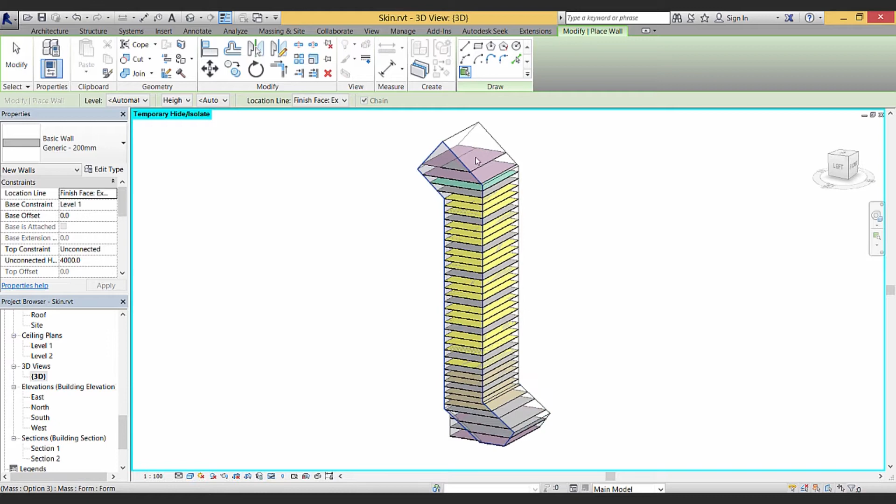But if you're going to have a curtain system, like a glass system, or any kind of crazy pattern thing, you're going to have to use a different method. Basically, you can create pretty cool patterns inside the conceptual massing environment, which is basically where you make this mass.

But there's a problem with divided surfaces and adaptive components and these kind of crazy components that you can use to create a cool pattern on your facade, and that is they're not room bounding. You need some kind of room bounding element inside your model to have the correct areas and outer boundaries for rooms. We'll get into details on that later. Basically, if you open level 23 and you start making rooms, they won't be enclosed. So you need closed spaces in order to start placing rooms.

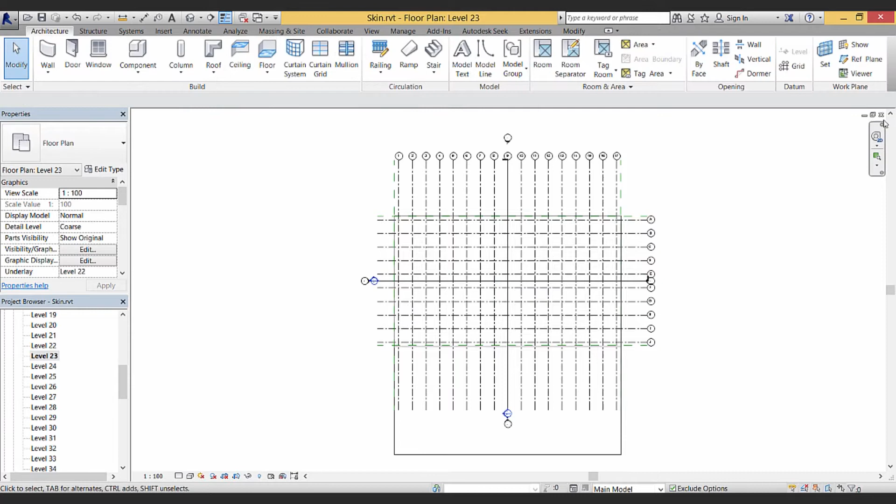Now, as I said, there are different ways you can do this. One way that I like is to just create a curtain system that's empty on this building, and then start playing around with the facade inside the conceptual massing environment. So this will be a dual exercise. First, we'll create a pretty simple empty facade just for creating room bounding elements, and then we'll create the real facade inside the conceptual massing environment afterwards.

So first of all, we go Massing, model by face, and we go curtain system instead of walls. The curtain system selected by default is the curtain system 1500 by 3000 millimeters. Before we click anything, you can see that Revit is asking us to stitch this curtain system to any of the faces inside our mass. So let's change this first. We go Edit Type.

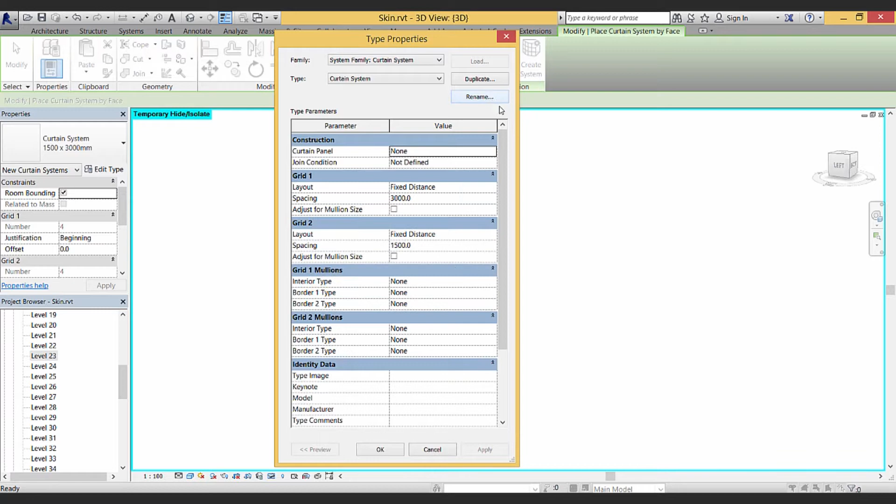I'm going to rename the type to just curtain system none, or whatever. Then I'll select the curtain panel to be an empty system panel. And then grids, no. Grid 2, no. No grids. Okay. And then I'll orient my model. You can use the view cube here.

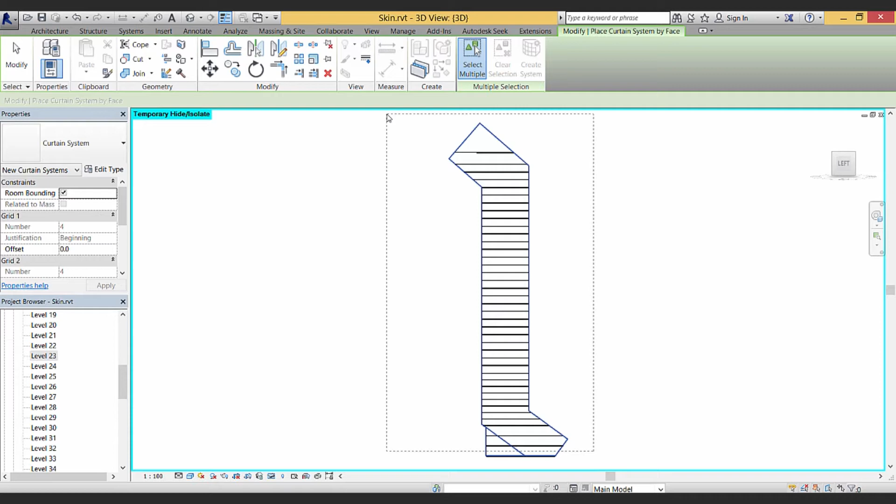I click left. Then I draw a crossing window across the entire building on all sides, but I don't include the bottom, the ground floor of this model. This is because I don't want a curtain system on the floor inside my building. So when I let go and say Create System, I'm actually done in 2 seconds.

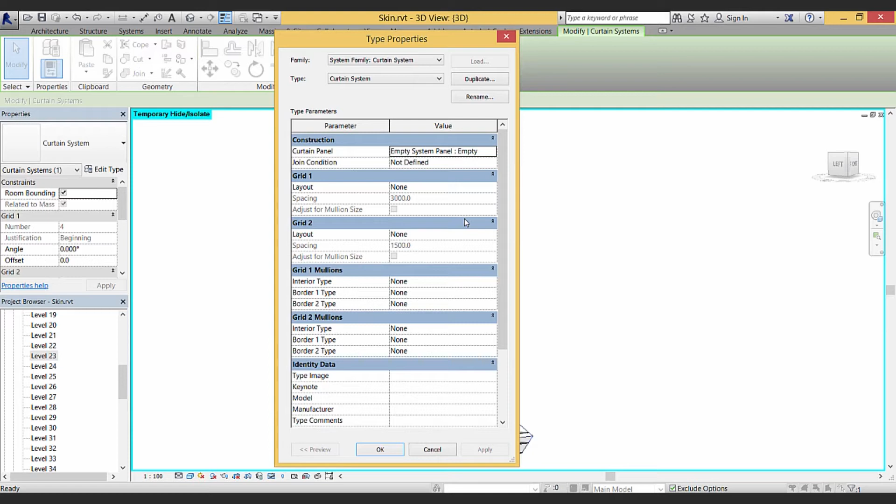So I click Modify or Escape, and you'll see that you can click on something here. It's called a curtain system, and it's actually a facade element. You can go into it and change things around, adding grids, distances between grids, panels and everything. But as I said, it's not going to give you a lot of options for making a pretty cool facade. So if you want to make a cool facade, you have to do different things.

But this one is room bounding. And that's pretty sweet because now you can go back to level 23 and start adding rooms like this. It's an enclosed room. When you add this room, it's going to give you an enclosed room with areas and all kinds of information that you can use later on when you start designing your floor plan. We'll touch on that later.

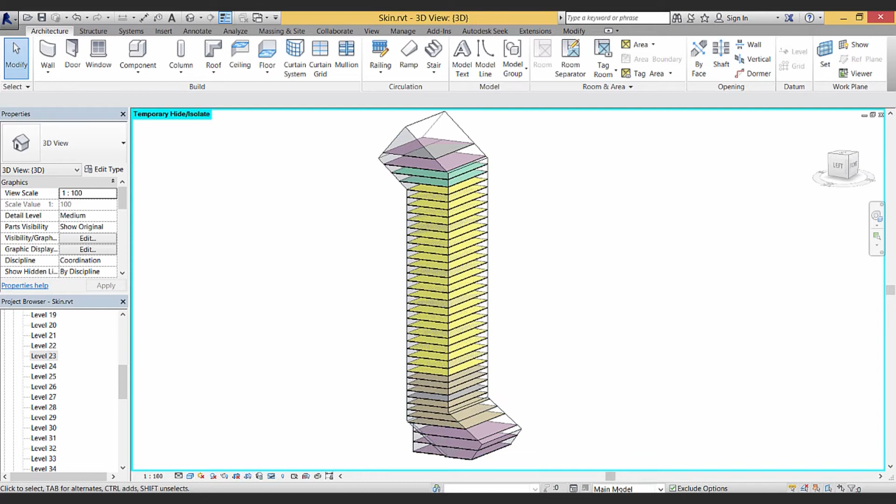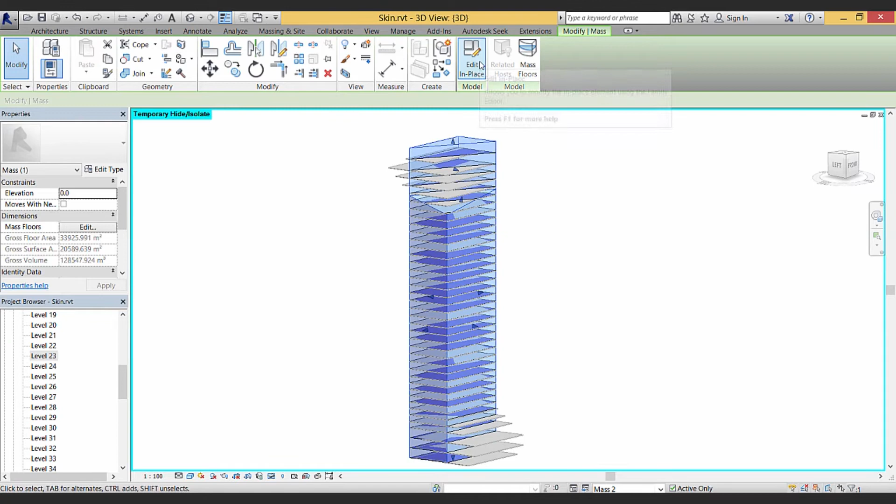Next up, I'm going to give you a quick introduction into how you can make a facade that looks a bit more interesting than just a normal uniform facade. To do that, you need to enter the conceptual massing environment. For a placed mass like this, you just open the family. Like I said earlier, in option number 2, we have this one here. You just go Edit In-Place, which is something else. You enter sketch mode for this family inside the same project environment.

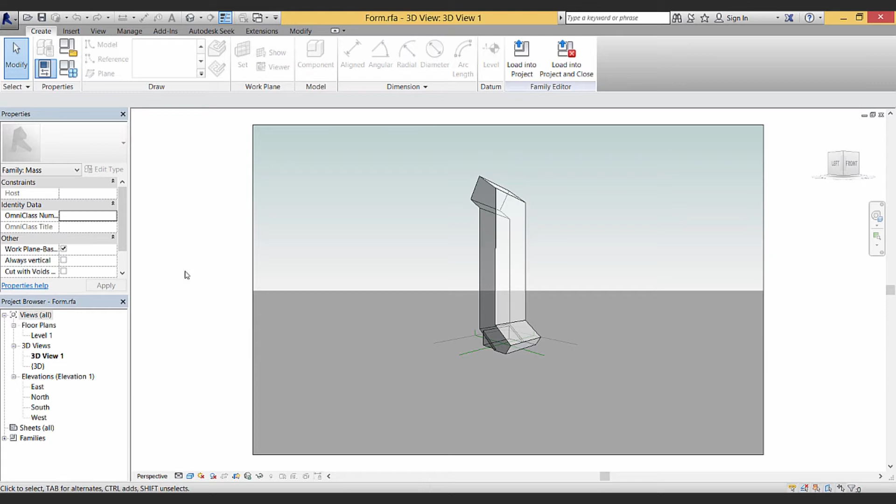Now, the placed mass that I modeled in option 3, if I open Edit Family, it will actually open a separate file. I haven't touched much on that yet, but this is a separate file. It's called form RFA, that's the file extension for Revit family. So inside here, you don't have access to the project information. This is a separate family, and you can use it in any other project. My colleague can edit this family in a separate Revit session, and then I can just load it into my project.

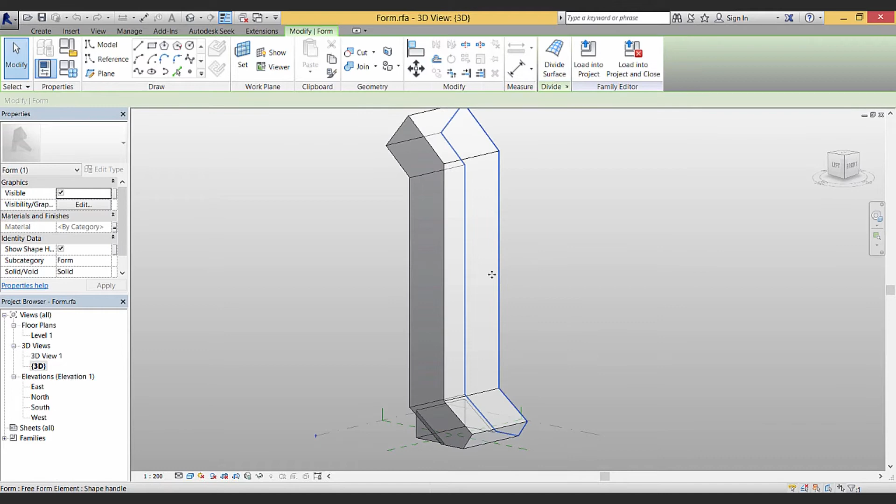So the interesting thing when it comes to facades in the conceptual massing environment, which I'm in now, is that you can click on any surface and use a Divide Surface tool. Basically, click on one or several surfaces or faces, and then you click Divide Surface. Divide Surface will now put an element on your surface, and it's going to have a grid.

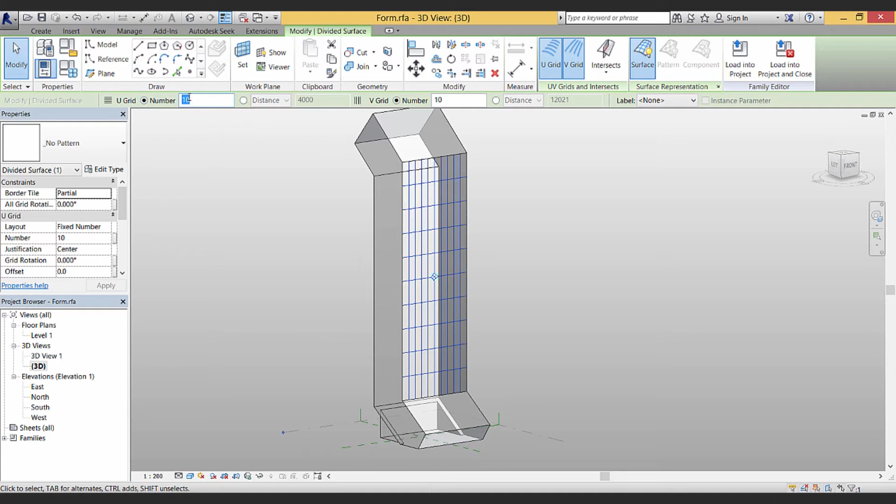So this grid, you can change the grid spacing using these new parameters that you get access to. You have a UV grid that you can change parametrically. If I change the U grid number to 20, you see that it gets a much denser grid horizontally. Let's change this guy back to 10, or the V grid to 20. You can see that it gets a much denser grid vertically or horizontally.

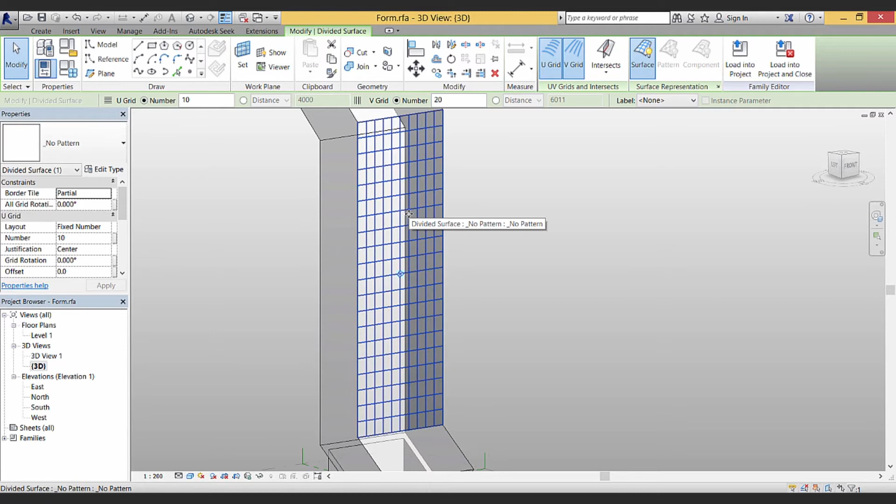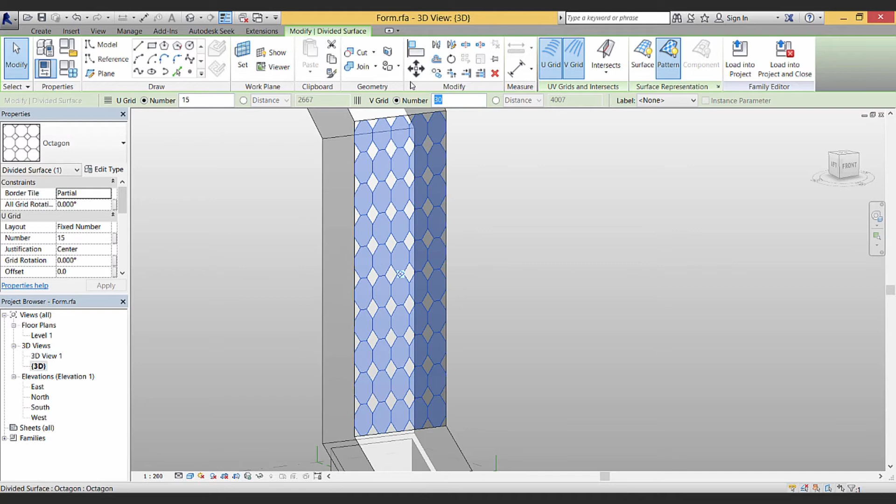The other thing you can do that's pretty cool is change the pattern. If you click on this grid and select it, you can go to the properties palette and change the pattern to something else—arrows, hexagons, or octagons. You can still change the grid spacing, 30 like this, or 15 like this. This is much more flexible, parametric, and I think beautiful than anything you can do with curtain systems inside Revit.

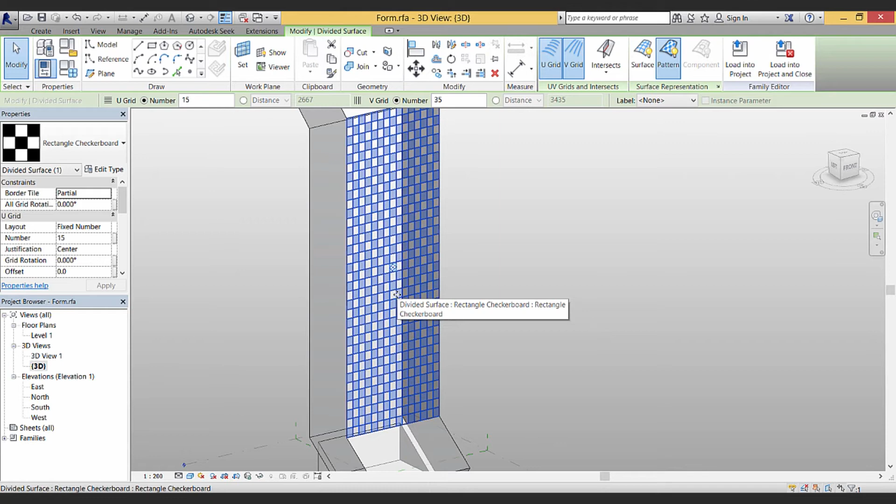So let's change this to something like a rectangle checkerboard. Then we can start parameterizing this, because we want to have parameters to change the spacing of these grids. One way you can do that is to change the actual layout of your grids.

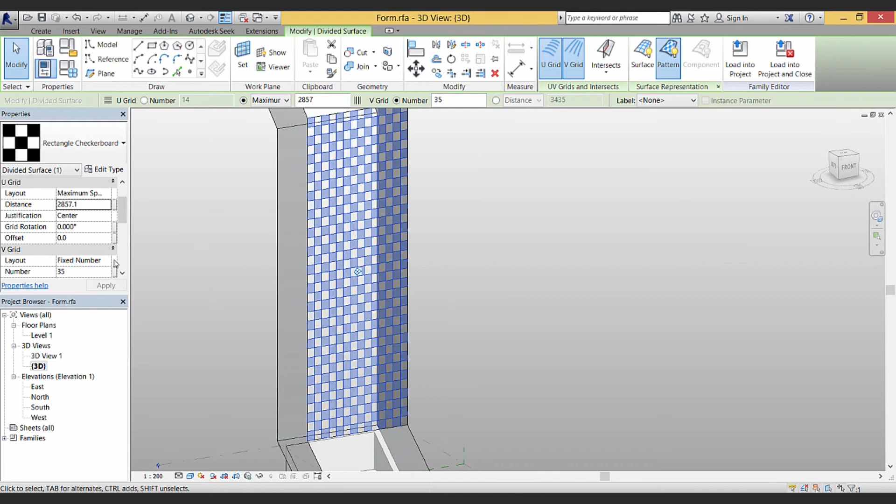Basically, instead of a fixed number, you can go maximum spacing or fixed distance. When I change the layout from fixed number to maximum spacing, I use different inputs. With fixed number you say 16 or 15 or 14 and it changes your spacing. With maximum spacing, I have to enter a real number, so I can change this to 1 meter, for instance, and get an insanely dense vertical spacing between the checkerboard panels. Let's change that back to 2 meters.

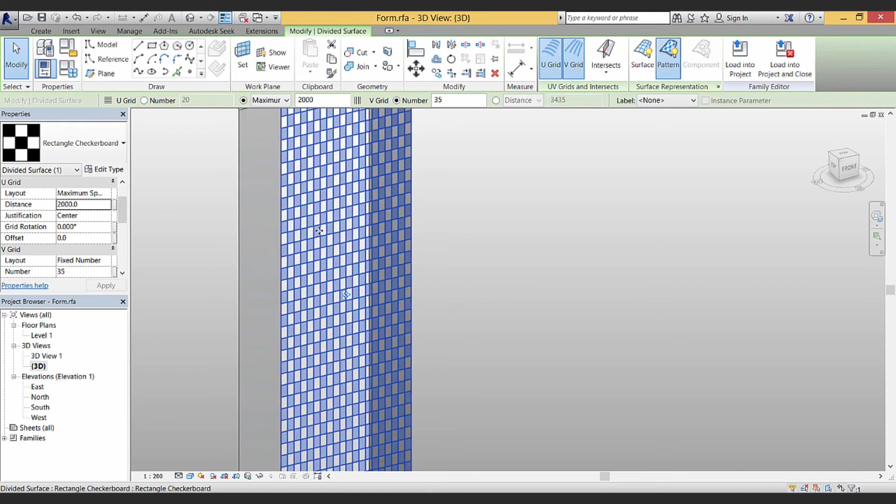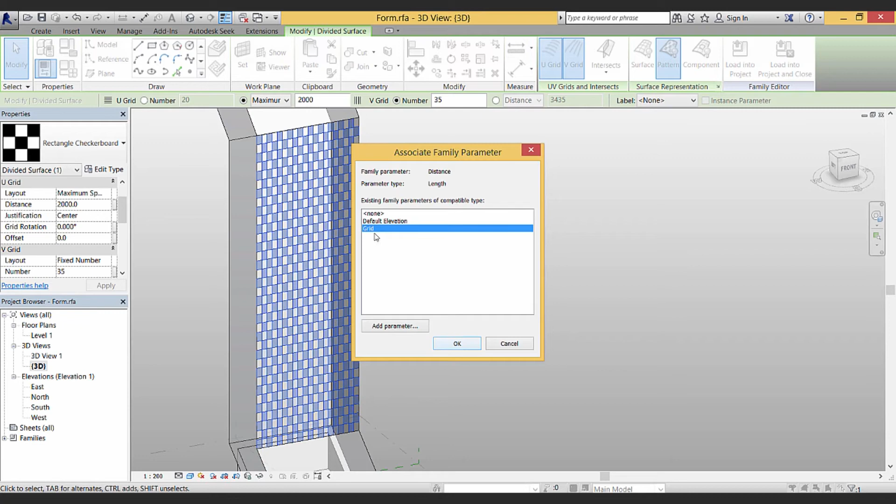You can also associate that parameter, which is now just the U grid parameter for this divided surface, with a new parameter by clicking the small button next to the distance that says 2 meters. So I associate this parameter with something else—let's call it grid. I already have a parameter, I've cheated, sorry about that. So I'm associating the maximum spacing distance parameter with a new parameter called grid. OK, and then it changes to what?

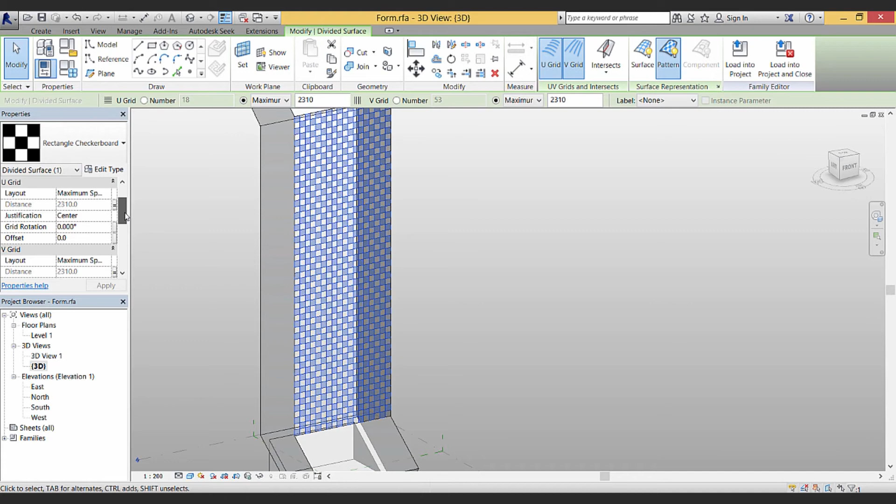2310. Cool. Let's do the same thing with the V grid layout—go maximum spacing, associate the distance with the same parameter, grid. Now the grid spacing is identical in both the U direction and the V direction, at 2.31 meters spacing. The power of this is that using the family types dialog box, I can go and change the grid spacing of multiple directions at once. Let's change it back to 4 meters, or 2310 like this.

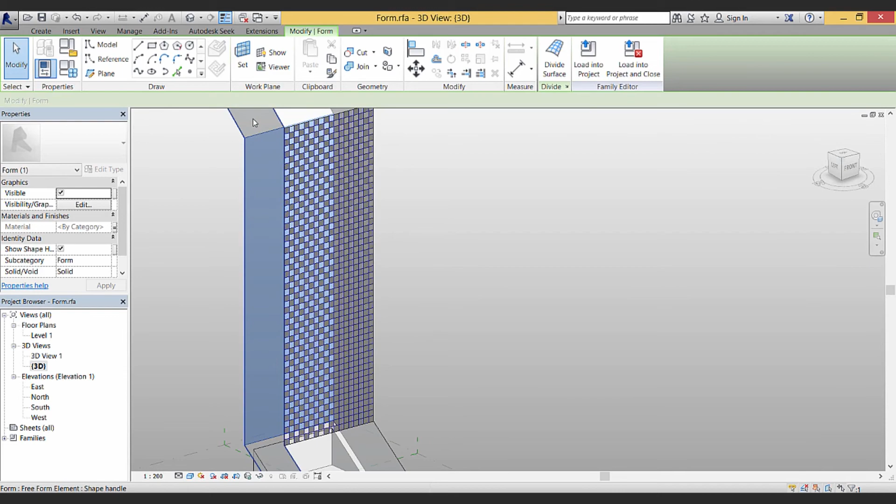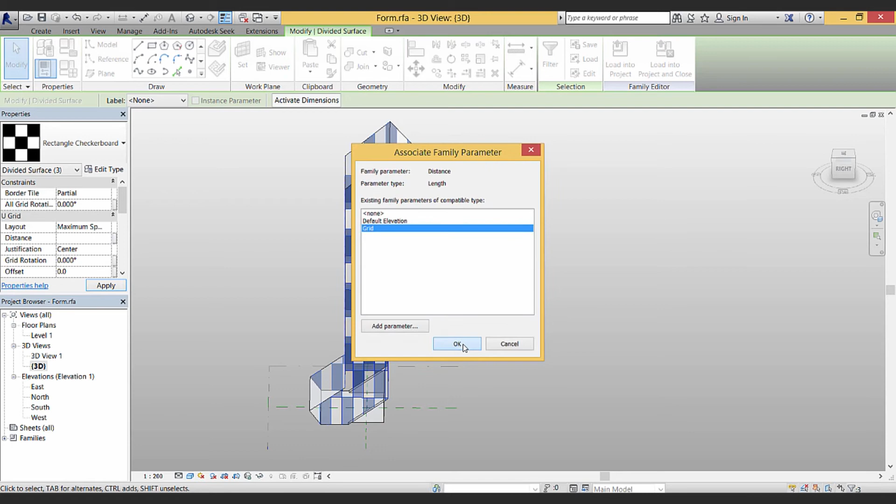I can also click on this facade, and this facade, and the back facade, for instance, and then go to divided surface. I go from no pattern to checkerboard pattern, change the maximum spacing, and associate the parameter with the grid parameter, doing the same thing in the V direction.

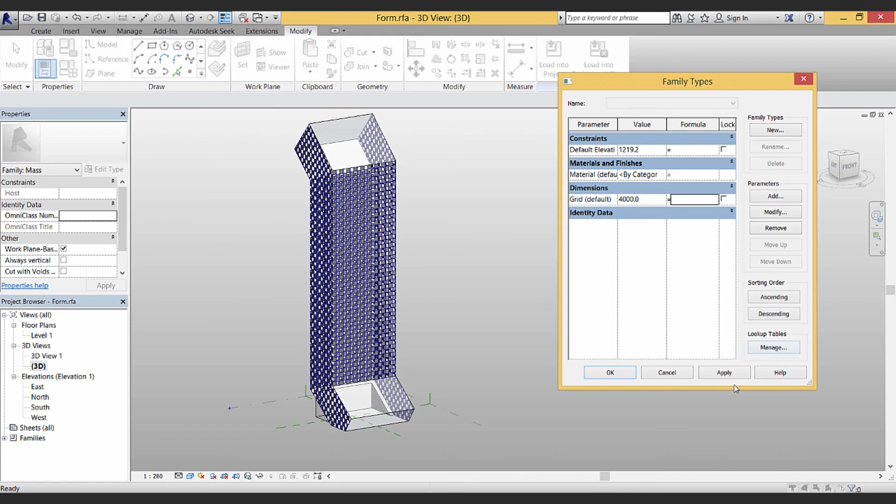Now you see the real power of this parametric way of working with elements inside Revit. I have one parameter called grid, and when I change it—not 45 meters, just 4 meters—and apply, it changes the grid spacing of the entire facade. That's pretty cool, and I'm not even going to go further with this.

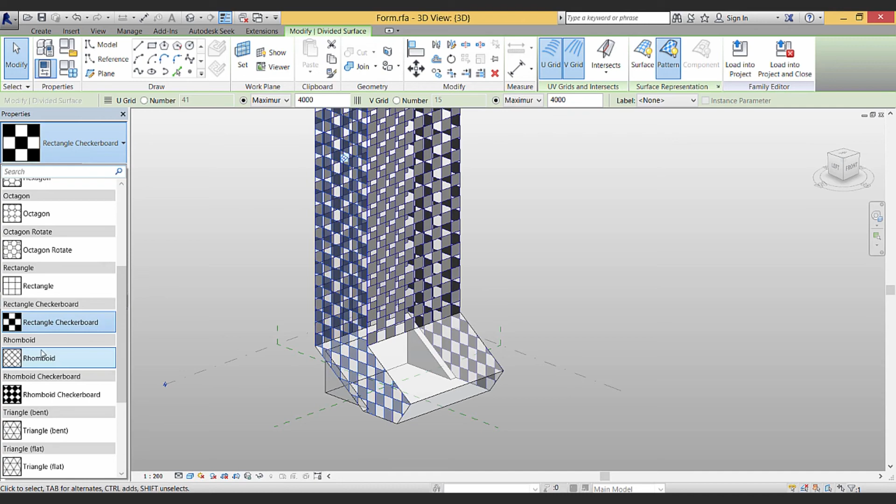Let's just say the rectangular checkerboard here is a set, and there's also rectangle and octagon rotate patterns. All these are predefined patterns, and you can make your own based on these templates. There's a lot of possibilities here, and you can start playing around with adaptive components—not really suited for Revit basic training, but there are many possibilities to do cool facades inside Revit.

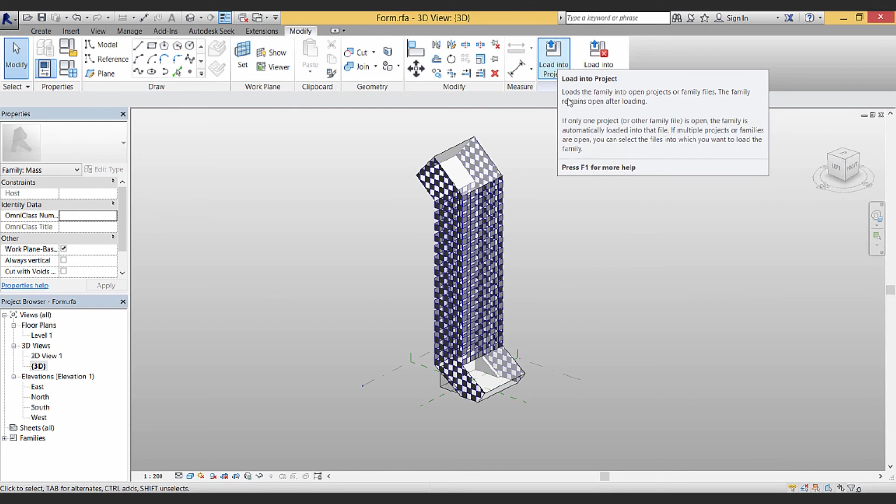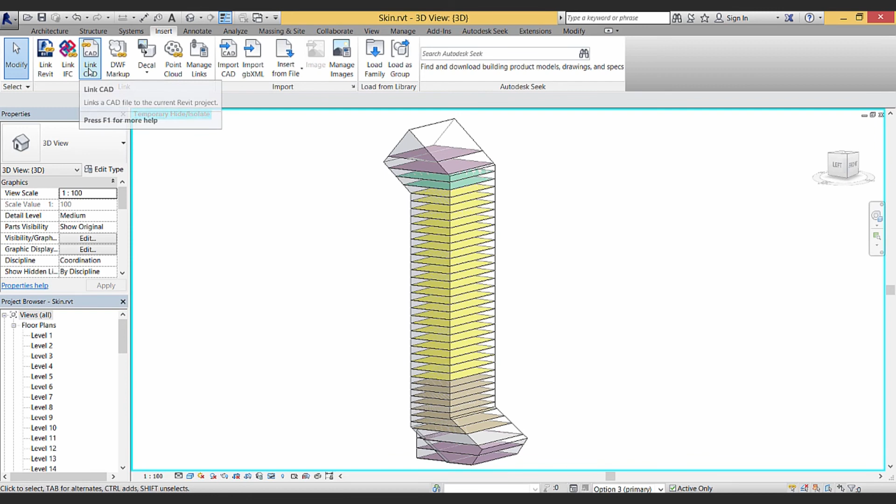Now we can either load this into our project, or cheat and load a family that I already made—and I think you can guess which option I'm going for. So I'm going to go Insert, Load Family. Insert is a tab inside Revit where you pull in anything not natively a Revit family, like other Revit files, IFC files, CAD files, point cloud files, whatever. You can also load another family using the Load Family tool here.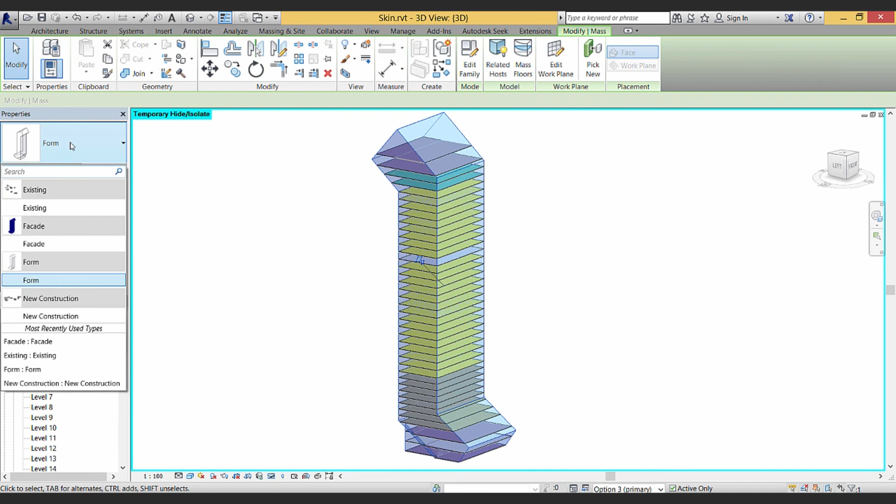Let's go back to the references, where I have a family called Facade. I'm going to load this family into my Revit project. I'll click on the Form family and change it to the Facade family, which is basically the same family but with the parameterized grid.

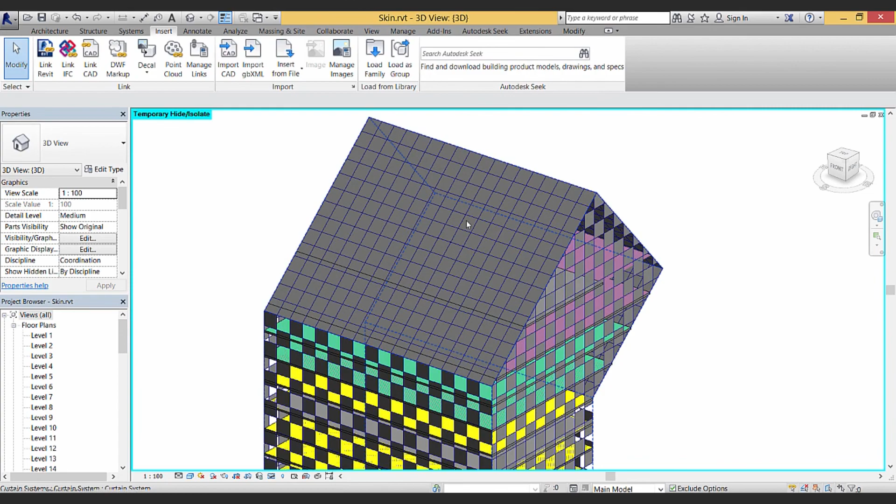And that's it. Now I have a pretty cool facade with a checkerboard pattern around the main body of the building. I have some solar panels up here, glass panels back here, and more glass panels back here—really glass panels, although they're not transparent right now, but basically a pretty cool pattern. I also have the room bounding curtain system that allows me to add rooms, which is the best of two worlds.

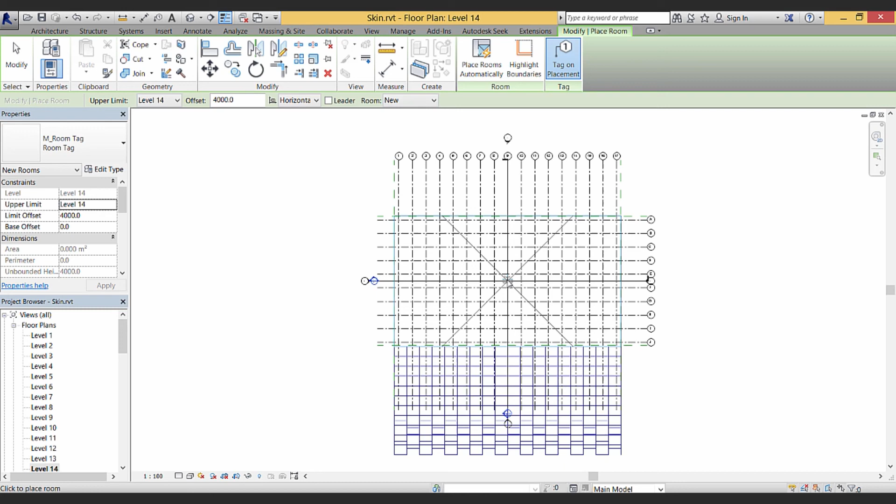So next chapter, we're going to start looking at wall elements inside Revit, and we'll start working out a plan. See you then.